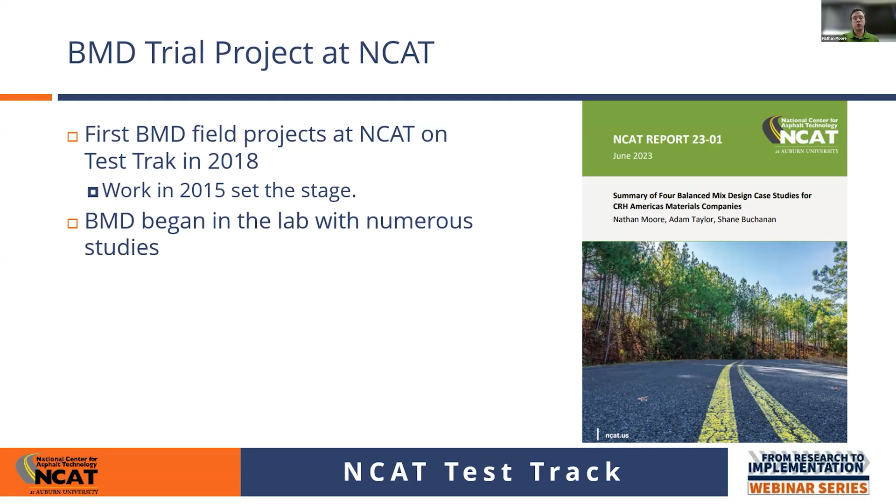So NCAT was involved, and I looked back through the history - I'm about 88% sure that some of the first field trial projects we were involved in, and I say field meaning non-research environment, non-test track environment, was in 2020 with the Alabama counties. We helped develop a simple BMD specification, I think Buzz Powell called it at the time, which allowed up to 35% RAP and had minimum ideal CT of 50 and a minimum high-temperature IDT of 17.

Those numbers were gleaned from work on the test track, and since the counties that used this specification were close by to the track, there was very simple adoption of these numbers.

So there were two counties, Houston County and Geneva County, who did a lot of this work. In a 2-year period, they placed over 60,000 tons of simple BMD mix on the counties. That's a really big deal because sometimes counties may not have all the resources that a state DOT has, or the state routes might have offered to them. So the idea here is: how can we better serve, from the county's perspective, the county engineers, and our constituents by producing good mix.

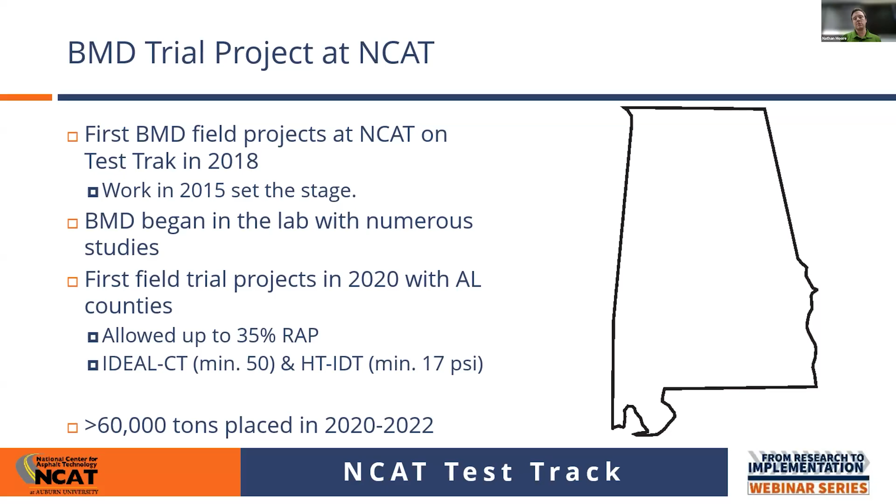Alabama counties were really proud of this, and this specification is now even still active.

What lessons learned as you move from the test track to the real world, or any research environment to the real world - you do have challenges. Early challenges as we move from research to the field include lab equipment.

How much additional equipment am I going to need that I don't have? What's the right type of equipment? What's the right load press I need to buy? How many environmental chambers or water baths do I need that I don't already have? Are there special jigs or software that I need? Are there more people I need to hire, or do we need new training to better understand some of these test methods and procedures?

Also, site conditions matter. You can go to the track or a small field experiment where you can pretty accurately characterize the site conditions. But if you're paving 60,000 tons, you're paving over all kinds of underlying layers, from something that could stand as a perpetual pavement to paving just on top of a chip seal. So that introduces new challenges and requires a lot of good planning.

Normally, when you see balanced mix design implemented, you see asphalt contents increase. This was the case in Alabama, where mixes that were former county mixes for those types of routes, when BMD came, saw an increase in asphalt content of 0.5% or even higher. That number is pretty common as you talk to different DOTs that have done the work of implementing balanced mix design. You see an increase in asphalt content.

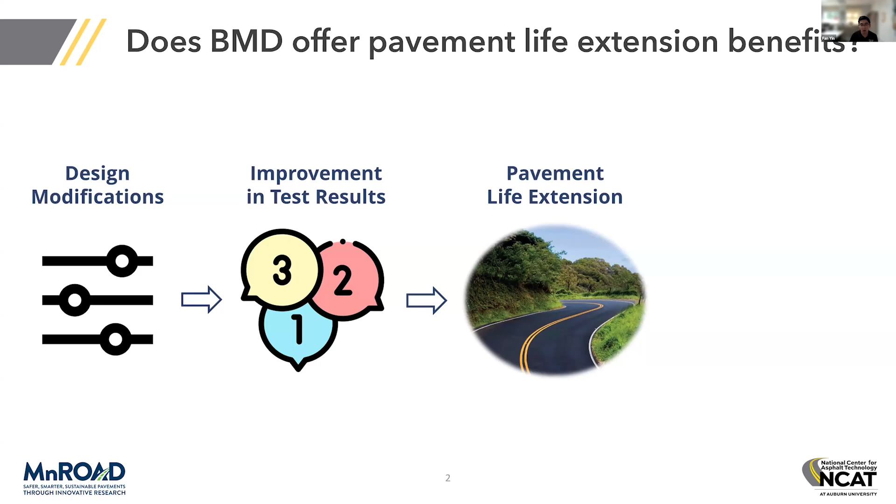That's really kind of the ultimate goal of what we try to do with balanced mix design. When we get life extension benefit out of it, it provides us the opportunity to look into the long-term cost savings and the environmental benefits associated with that. That's really the expectation when we talk about implementing balanced mix design.

Many of the field projects we have seen so far across our industry are only a few years old, and we don't have that real long-term data to look into these analyses to see whether or not we can achieve those expected benefits.

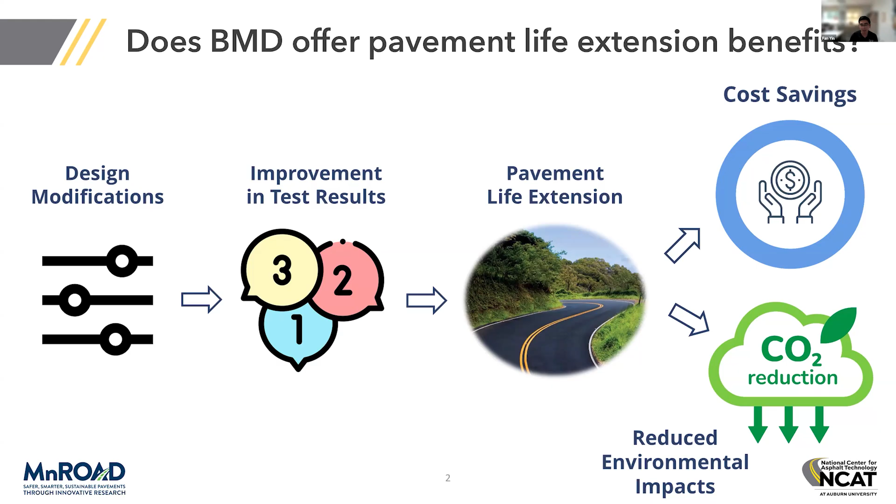With that being said, TxDOT approached NCAT, and we were very fortunate to have the partnership with TxDOT on this experiment on the test track, to truly leverage the advantages of accelerated pavement testing on the NCAT test track to look into that life extension benefit of BMD. That's really the focus of my presentation.

The focus or objective of this experiment on the track is very straightforward. It's almost an apple-to-apple comparison between the BMD mix versus the volumetric control mix. We put those sections next to each other to see how they perform. In our opinion, that's a real test.

In this experiment, TxDOT requested that we do overlay projects, because that's the type of projects they deal with on a daily basis, with a 2.5-inch mill and inlay on the track.

One very unique feature of this experiment is that we have a fairly challenging underlying pavement condition. We've been very excited about this feature because it does a really good job simulating what we have in the field.

Ideally we'd like to live in a world where we don't have much underlying pavement challenges - everything is perfect in terms of pavement condition, and we just do the surface layer on top, and it performs beautifully, right?

But unfortunately that's not the case. Lots of the pavements where we do overlay or mill and inlay projects, we deal with underlying cracking issues that will affect the cracking performance or overall pavement performance of the surface layer. So that's really the intent behind the decision to go with a 2.5-inch mill and inlay over a challenging underlying condition for this experiment.

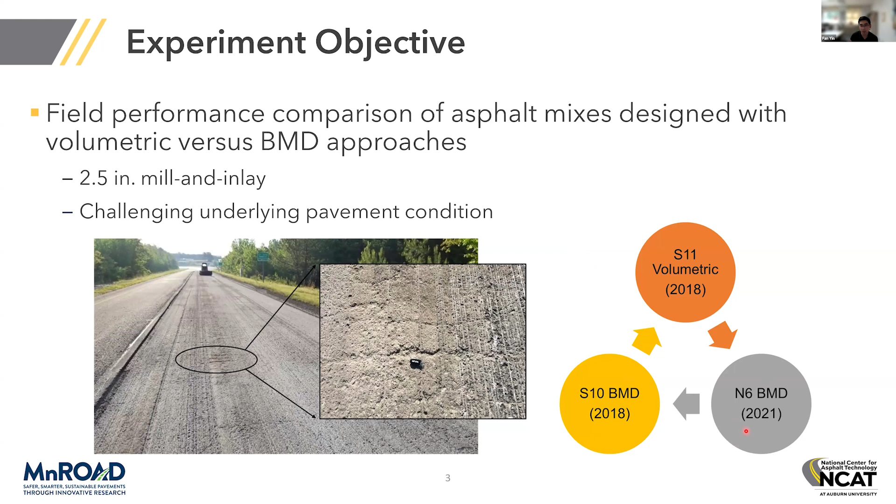Balanced mix design really varies from state to state, depending on what kind of pavement distress you try to battle against and what kind of mixes you want to apply. In this experiment, TxDOT decided to focus on a 12.5 millimeter SP-C surface mix.

Those mixes are all coarse graded with 50 gyrations. They all use the same component materials, but at different proportions. I'll give you more information on the next slide.

All 3 sections use a PG 70-22 SBS modified binder, and they all had the same RAP binder replacement ratio. That means the RBR remains the same, but the RAP content by weight of the mix is different, because they have different binder content required to achieve that spread in the test results in terms of rutting resistance and cracking resistance.

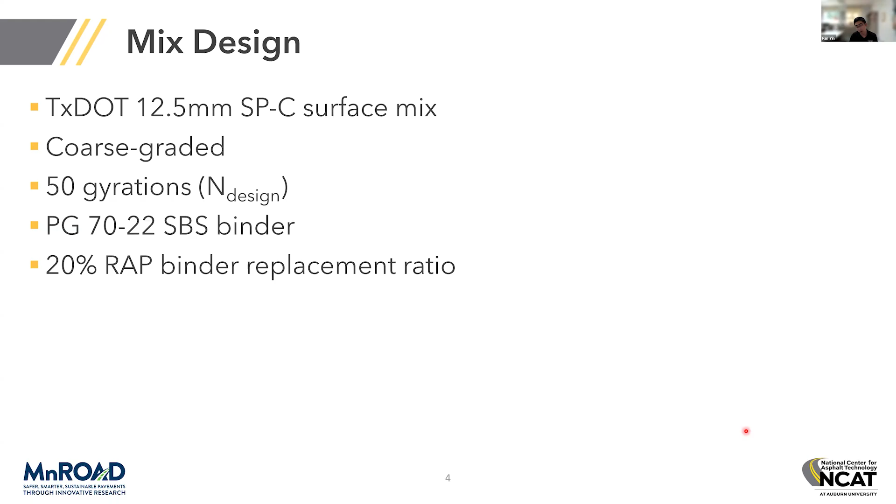Balance mix design is really like a buffet table. That's the term I've been using because there are so many different ways you can use to modify your mix design to improve your cracking test result, while at the same time trying to maintain good rutting resistance, and therefore achieve that balance between those two.

Nathan mentioned there's been lots of work looking into asphalt content, but we know asphalt content is not the only tool we have to achieve balance mix design. Some other work in our community includes looking at gradation change, playing with recycled binder content, recycling agents, polymer modification, or lower temperature warm mix asphalt. So it's really up to the contractor to pick which one is most cost effective, while giving them the opportunity to optimize performance meeting the agency's specification.

In this specific experiment, UTEP, University of Texas El Paso, was the research partner involved in the mix design effort. The modification approach they took for this experiment was to look into the gradation change, and based on that, to play with different asphalt content.

I mentioned earlier that all three mixes are coarse graded. So what they did from the mix design modification standpoint was to further coarsen up the gradation so you can create a more open void structure within the mix that allows more asphalt binder to be added, while maintaining your designed air voids.

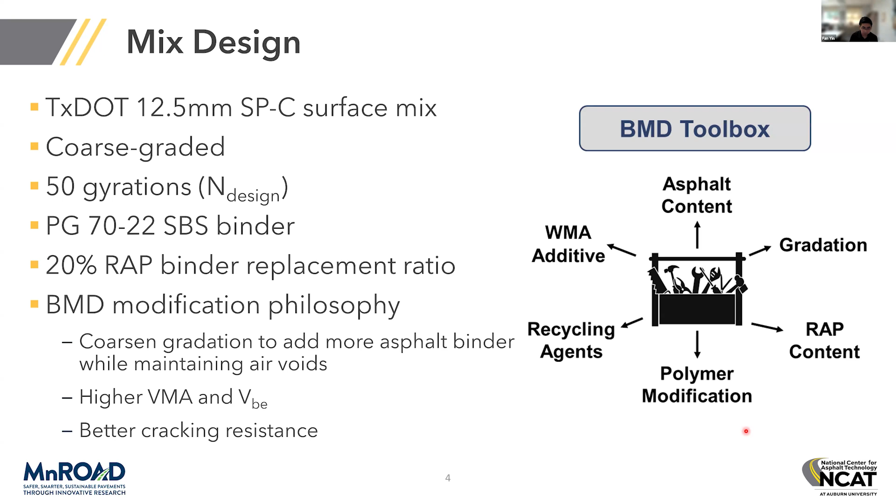There was lots of design detail that, in the interest of time for today's presentation, I'm not going to share all of, but here's a quick summary of the mix design differences among the three mixes we have in this experiment.

For the volumetric control section, the total binder content was 4.7. If you look at the BMD mix from the same research cycle in 2018, that number increased to 5.5. That's a 0.8% unit increase in asphalt content. That's a lot, right? We know asphalt binder is the most expensive component.

Nathan mentioned earlier that lots of work in the BMD era has looked into increasing binder content. That's really one of the most effective ways to improve your cracking resistance. We know it's going to be more expensive because of the higher binder content, but the expectation is that this change will give us better performance, longer life, and that will justify the material cost increase from the life extension benefit standpoint.

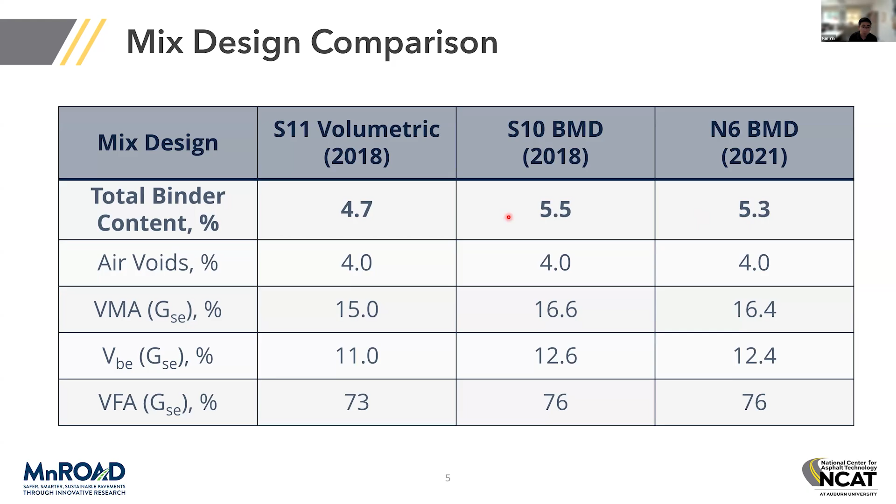In this case, they are looking at the rut depth at 15,000 passes for the rutting criteria. Maximum rut depth is 12.5 millimeters at 15,000 passes for that PG grade I mentioned earlier. And for the OT data, the parameter was CPR, the crack propagation rate. A lower number indicates better resistance to crack propagation.

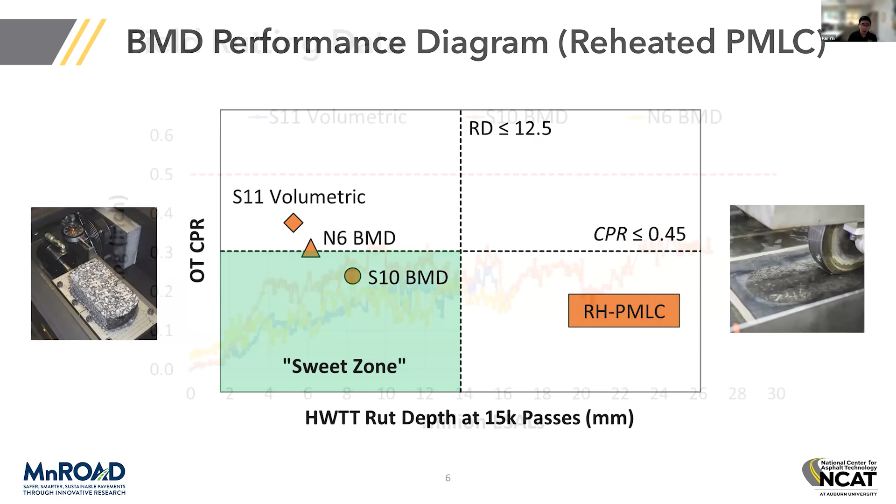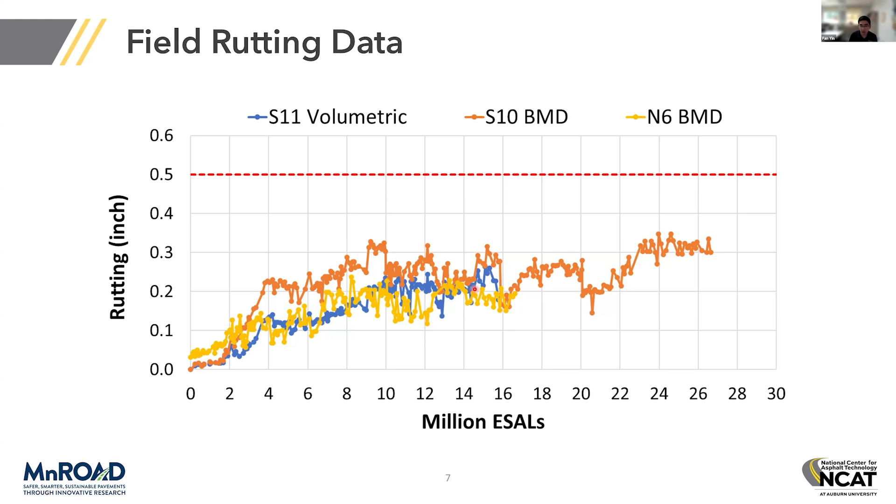Now if you look at the S10 BMD section, it was placed at the same time as S11 volumetric control, with identical underlying conditions.

One thing you notice first is that it took longer for this section to show cracking in the field, compared to somewhere between 5 million ESALs, we were able to delay that to somewhere between 9 to 9.5 million ESALs.

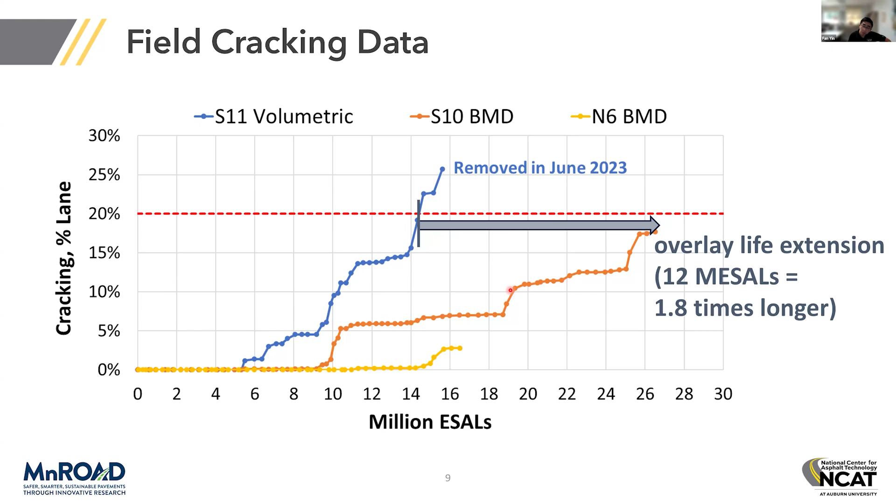After we got these field performance data, we did some preliminary life cycle cost analysis and life cycle assessment using the field performance data. We did the LCCA analysis using some of the guideline information that TxDOT has been using. There's lots of assumptions that go into this analysis, but I'm not going to walk you through those details.

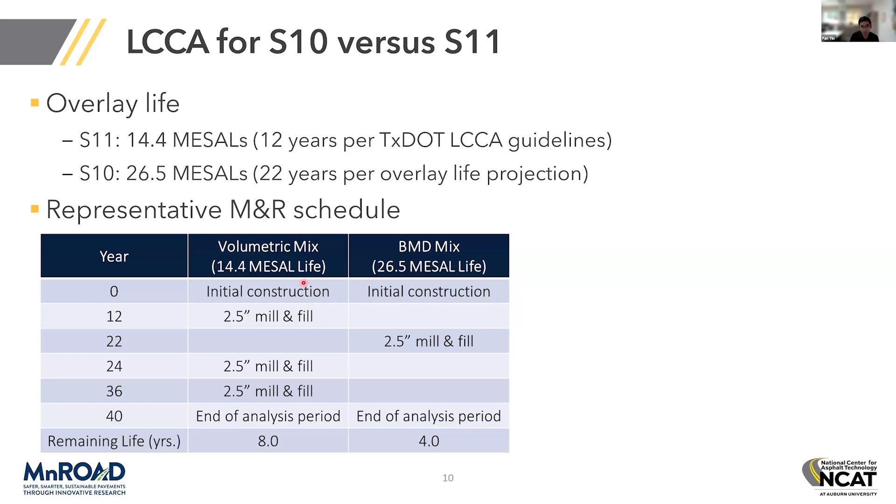The most important part is that we're able to take the field performance data from the test track and translate that into a life cycle pavement maintenance and rehabilitation schedule for a hypothetical overlay project or open highway in Texas. Because of their field performance difference, the volumetric mix and the BMD mix are going to have different overlay cycles within the analysis period.

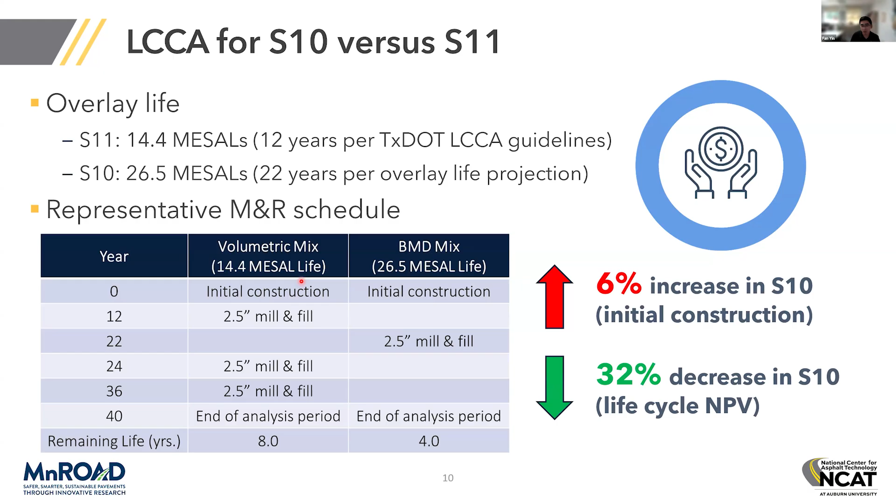So now jumping into the conclusion of this LCCA, because of the higher binder content in the BMD mix, we saw a 6% increase in the mix cost for the BMD section compared to the volumetric section. That's only the initial construction part of the story. But because of the extended life from the BMD section, we do see a 32% decrease in the life cycle net present value associated with the BMD section compared to the volumetric section. So that number is significant. It definitely highlights the life extension and also the cost saving benefit associated with balanced mix design.

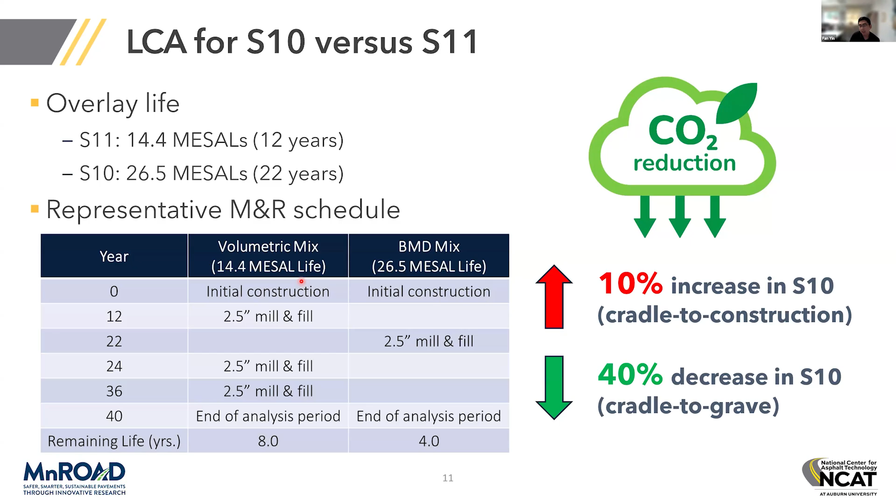And then the same thing we saw on the LCA side, from cradle to construction, we saw a 10% increase because of higher binder content, higher CO2 emissions. But when we look at cradle to grave, considering the whole life cycle assessment, that is where we saw a 40% decrease in the BMD section compared to the volumetric section.

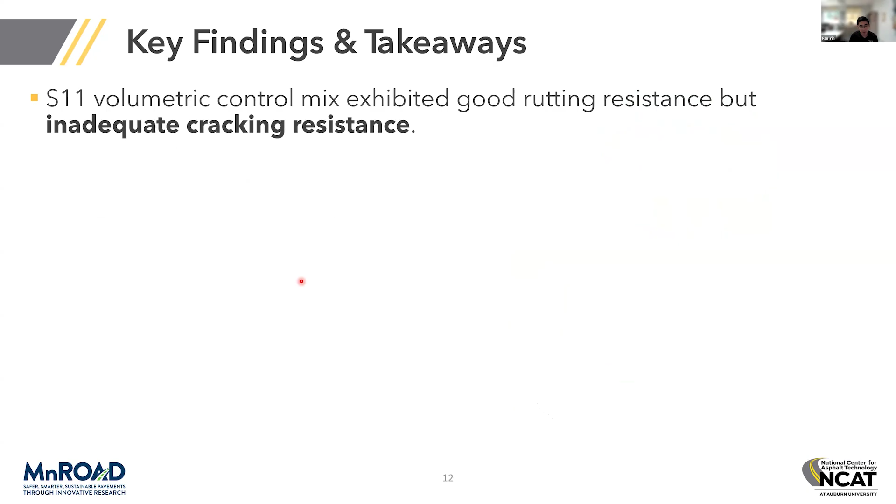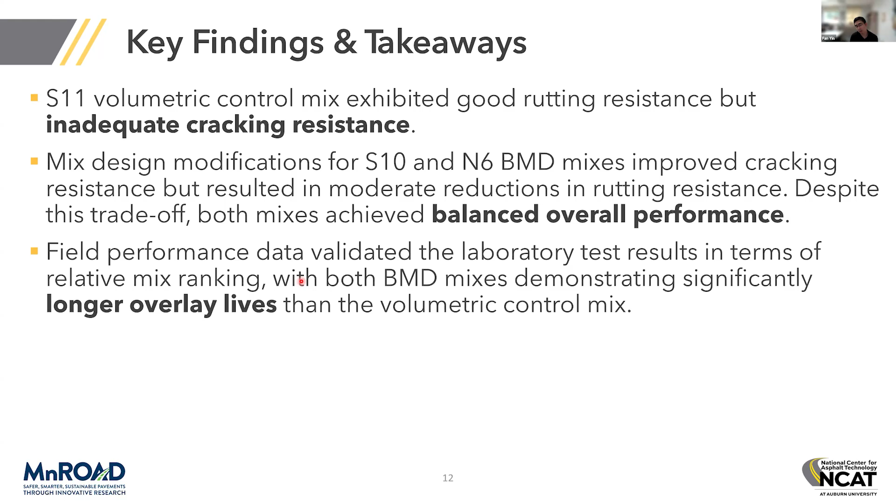So wrapping up everything, what we learned from this experiment is that the volumetric control mix showed good rutting resistance, but not so much on the cracking side. That's what we expected, knowing what we have seen so far in the field. The mix design modification for both BMD mixes significantly improved the cracking resistance, but resulted in some moderate reduction in rutting resistance. But that shift gave us more balanced performance between those two properties. The field performance data on the test track validated the lab test results in terms of relative mix ranking, with both BMD mixes demonstrating significantly longer life compared to the volumetric control section.

So the most important finding from this experiment is that implementation of balanced mix design should be expected to improve mixture quality and extend pavement service life. Even though the initial cost may be higher for BMD mixes because of the modification required to achieve that balanced performance, if we look at the life cycle assessment for both cost and environmental side, we see benefit on the economic and environmental side. So that's really what we should expect with the implementation of balanced mix design.

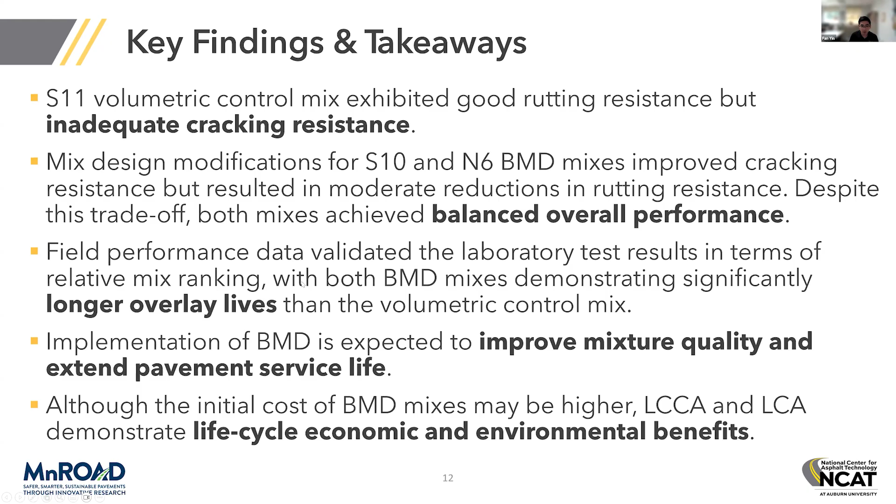So that's really what we learned from the exciting experiment from the test track. Thanks to the sponsorship of TxDOT for this exciting work.

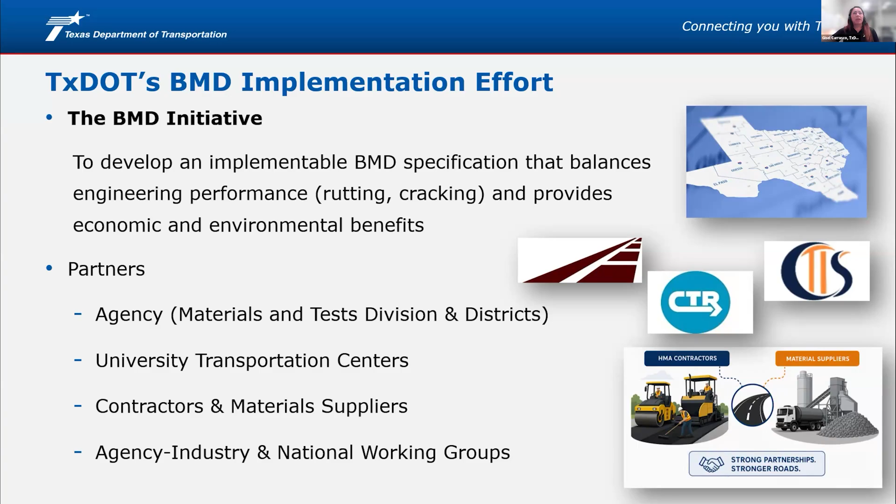So at the beginning, everything started with research, right? Developing performance tests, tests that started using the Hamburg test for rutting performance, and then the overlay test. Since then, agency and industry was heavily involved in the implementation. So they were already kind of familiar on the whole process of implementing a new test, more of this type of test that requires more than testing volumetrics on our hot mix. It requires a lot more equipment, more training for our technicians, development of new thresholds.

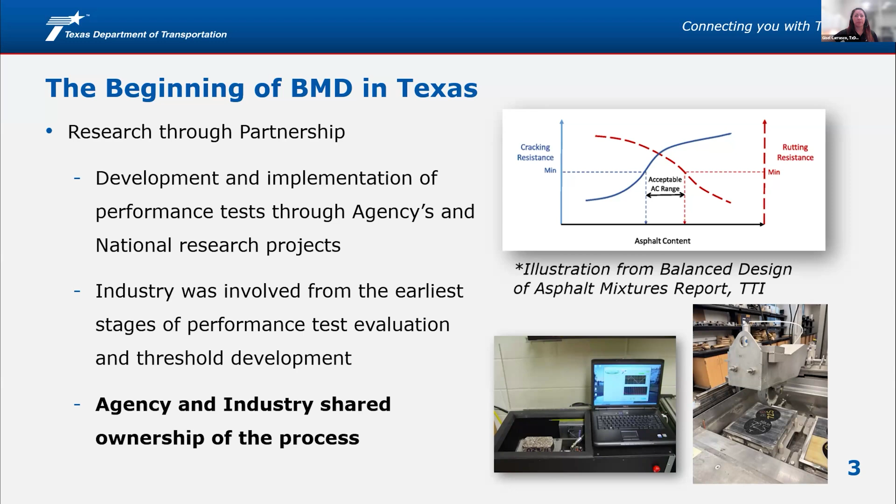As Fan mentioned, we started with our test with NCAT test track with our test sections balanced mix design. And as we're getting these updates through the years, we knew and it gave us confidence, not only to the agency but also to contractors, on seeing how the test sections were doing and how they were even doing so well that we decided to go to the next step.

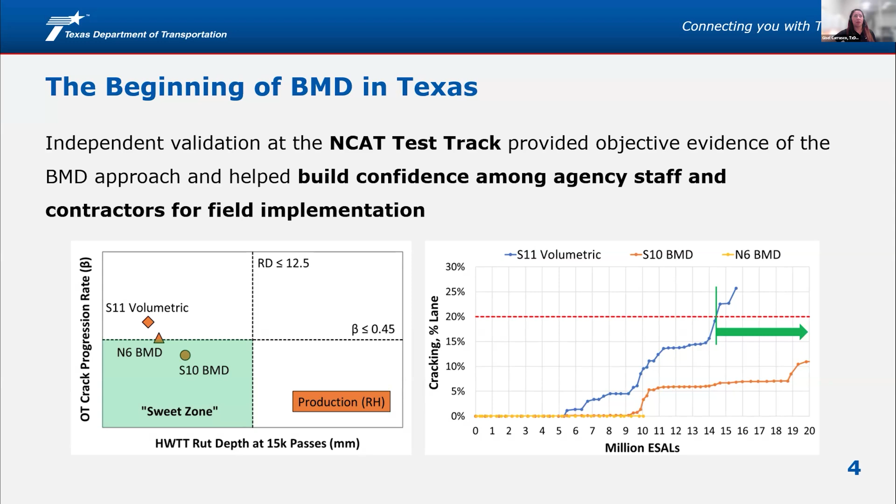The next step was to start building trial sections through our districts. So to do this, we started talking to different districts to see within a project that they already had going on to see if we could have test sections, and then 6 districts were ready to do it. And even though we had 9 test sections, within those 9 test sections, we had different combinations of materials. Maybe one section was with softer binder and the other one was with higher RAP. So we had a total of 33 test sections within the state.

This allowed districts and contractors to also gain hands-on balanced mix design experience, but we didn't have an implementable statewide specification at that point. The objective was to identify the challenges and build confidence.

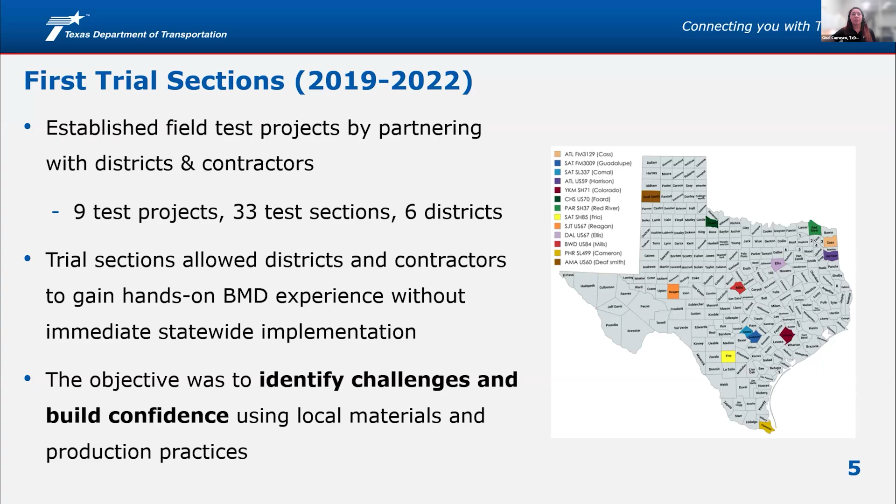Then the second phase for balanced mix design was more test sections, but now we wanted to see if we could produce this mix not just for a smaller test section, maybe a couple of days, 3 days of production. For that, we had a total of 4 test projects with 8 different test sections in 4 different districts.

When we were doing this, the Balanced Mix Design Working Group was developed. The goal of this group was to have not only the agency but also industry participating in this formal group so we could analyze all the data that we were receiving from our test sections and then see what were the concerns, what were the challenges.

Also, a different group was developed within the agency, which is called TxDOT Forum. The forum is a group of each district having a materials engineer or SME from each district that gets to review all these documents and all this information that we were getting and give their feedback. So it was not only the division reviewing the new specifications, but also all the districts had a voice to make their comments and their concerns, and we could share this information to the Balanced Mix Design Working Group.

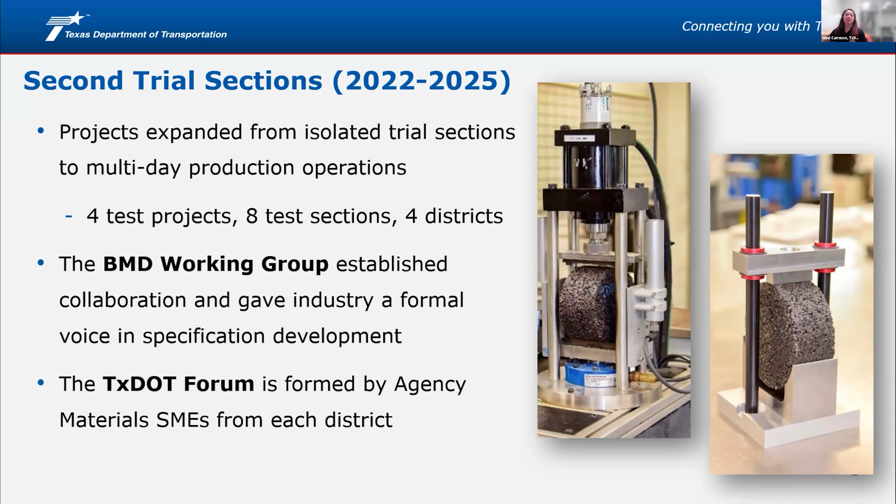So at the end of 2025, we were able to develop a one-time use special specification 3024, using all the data collected from the test sections. The goal of this specification was to use it in pilot projects.

Pilot projects will give the districts the opportunity to use this balanced mix design from the beginning of the project planning, all the way through letting and construction, using balanced mix design. That way the agency and industry will get experience using this new specification under real contracting conditions.

Last week, the El Paso District project started. It's been going on, and then we'll have Lufkin District starting next month. And then we have two more projects coming up in the following months.

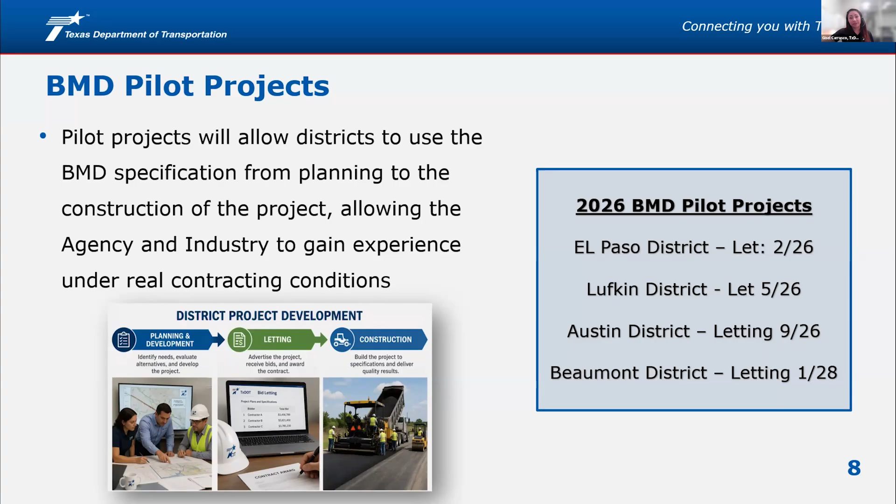So what were the challenges of implementing balanced mix design? Of course, the increase in sampling and testing requirements. We're having ideal testing being tested every day. It's a lot more testing than what we have in our regular QC/QA specifications.

And of course, the new equipment, we need more space in our labs, right? Sometimes those labs and the hot mix plants are small, so that's a big challenge. And then also certification, having our equipment calibrated, having technicians certified to run these new tests.

This test takes a little bit longer. They require curing of the samples, way more samples. That means greater laboratory workload and staffing needs and training.

And then with all this information from the pilot projects, we want to verify our criteria, right? And get and see and verify that our current acceptance and payment criteria can be adjusted. But that's going to be in the future, right?

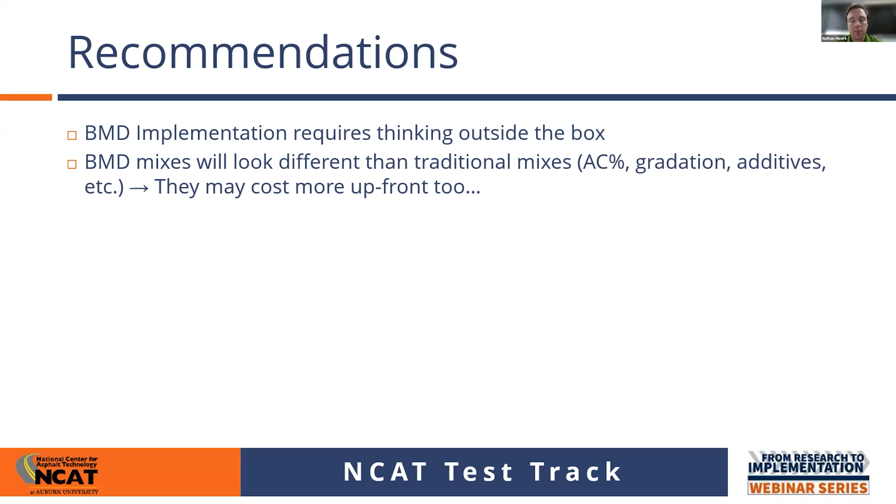And those mix changes are going to cost more upfront too. I think we just need to be honest with ourselves and recognize that they're going to cost more. However, the concept of price anchoring is very real - we have anchored our expectations for how much asphalt mix should cost off of mixes that across the country are on average too dry and not sufficient for meeting the needs of the traveling public. So yes, they may cost more, but I think it's worth it.

BMD and changes to mix designs like this will bring longer lasting pavements, and longer lasting pavements will equate to lower life cycle costs. It'll equate to lower life cycle emissions, so less strain on future maintenance budgets, resurfacing budgets, and rehabilitation needs. So yeah, we are sort of building this brick by brick, but it's worth it.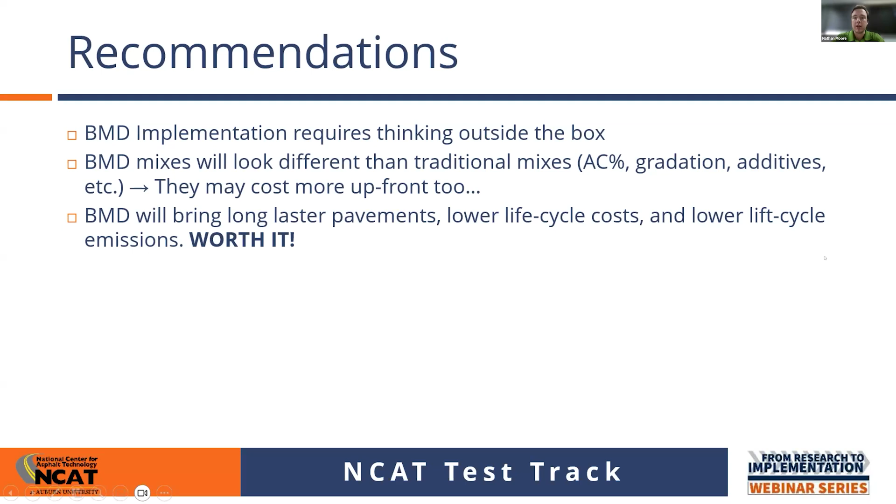Fan has a really wonderful case study that was developed in conjunction with the work that Texas DOT sponsored on the test track. But those case studies are all over the country in places that have implemented this. I see there were some folks on the call from Virginia who could probably tell you stories about this, and folks on the call from all over that have seen the value of balanced mix design and improving asphalt mixes in general, recognizing that it's worth it if we're having lower life cycle costs, more sustainable pavements, etc.

But these types of changes are slow and steady. TxDOT has been working on this for many, many years. I know some friends in Virginia had like a 5-year plan, for example, to implement balanced mix design. This is like smoking meat - it takes a long time, but in the end it's worth it. You can't microwave BMD. It is a big change, not just adding more asphalt to the mix. There's a lot. So slow and steady wins the race in this case.

Shadow projects, trial projects, where you're partnering with agencies and the agency and industry are partnering with one another to identify unexpected challenges.

Like, hey, I didn't realize that this was going to be the case, or that my workforce was going to have to be required to sample this much, for example, or that I didn't have the oven space necessary to age specimens or keep them hot.

But it also gives hands-on experience. And I thought Giselle's point was key. The main point here is really to build confidence. You're not trying to change the world with trial projects or shadow projects. You are on a fact-finding mission to figure out what challenges we need to overcome as we proceed toward implementing balanced mix design.

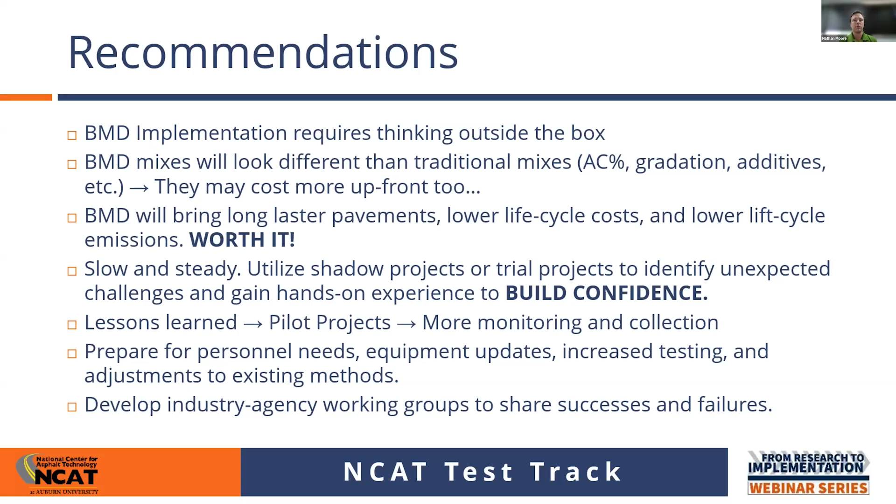And I thought Texas, you guys have just done a tremendous job of utilizing trial projects to collect information. So well done, and thank you for participating today.

So with that, I saw there's quite a few questions coming up in the chat. So Travis, I'm going to kick it back over to you. Thank you, Fan. Thank you, Giselle. Cool, cool, such a timely topic.

I really like this, and I really love how driven this is into the implementation of BMD in Texas, and I love that map that we get to see sometimes of all the different districts that have used this, the different counties and so forth.

So one of the things that came up, and it's kind of come up a couple times - I see there's some discussion going on in the chat group there, but I really like this one. I think it's worth discussing, and I think all three of you have a good perspective on this. What kind of correlation have we found in the data between the Ideal CT testing and the overlay testing? Are we finding that both relate to field performance? Do they correlate well with each other? Fan, you want to take that one first?

Yeah, I'll be happy to. For the BMD experiment on the Texas BMD experiment on the track, we did run Ideal CT as well, including different aging conditions. We have some good correlation or good agreement between the two, because this experiment is all about binder content and gradation difference, and both tests seem to do a really good job capturing that. I would say we have also seen some other data where those two tests may not correlate strongly because of the nature of the test. But in terms of picking up a dry mix or difference in binder content, those two agree really well.

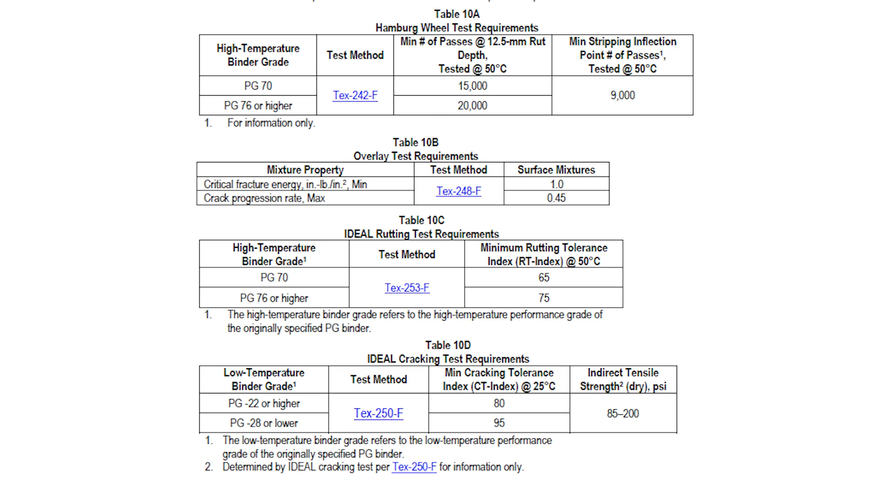And I think that's really neat that you have those 2 levels. So in production, when things are going smooth, we can go ahead and use both of the IDEAL tests to make sure our production is staying consistent. But then if we have an issue, we have built into the specification a way to go to a higher level test that we feel is a bit more extensive.

I think that's a fantastic approach, probably a really great way to have this dialed in for getting into QA, because that's a big part of where people are asking questions from DOTs: how do we do quality assurance with BMD and move this past just the mix design phase. So this question has come up a couple times, and Fan, I noticed you've thrown your poster up there.

Will you cover real quick the correlation you've seen between the Hamburg wheel tracking and the IDEAL RT testing? Yeah, absolutely. Long story short, these 2 tests correlate well, especially when you have mixes that do not have stripping issues in Hamburg. But when you have those mixes, you got to be careful with how you interpret your Hamburg data, because Hamburg is not just a rutting test, it does have that moisture damage component.

So depending on how you analyze your data, if you focus on pure rutting parameters, then those parameters correlate extremely well with IDEAL RT. And that poster that you made, does it include the data from NCAT report 2601? Yes, it does, and also includes a whole lot more data, not only from the southeast part but also northeast. I think we cover more than 60 different mixes from different places.

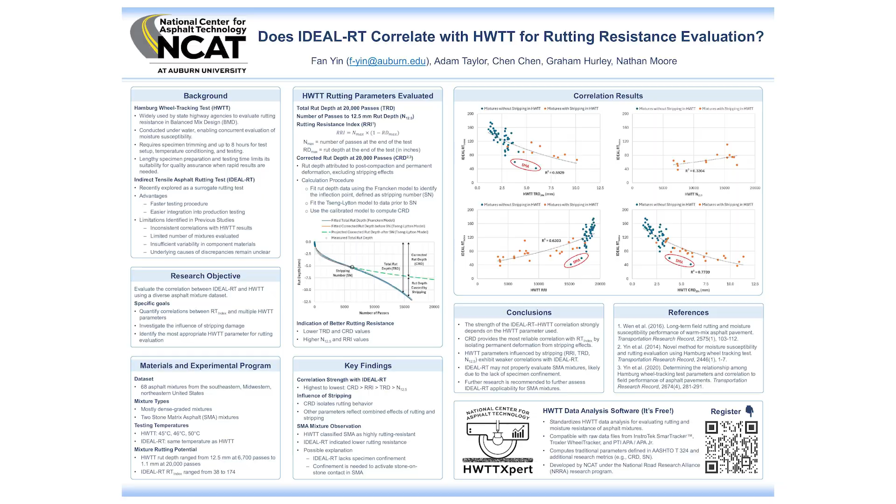Well, Nathan, you want to give just an idea of what's in that report 2601, and do you have some knowledge of the app that was created as well?

I don't know what app you're referring to. The analysis tool? Or is that a Fan thing? Oh, you're talking about the Hamburg stuff? Yeah, that was just more like a tool, a web-based program that we developed to try to help users, agencies, contractors standardize the calculation of any parameters you want to get from the Hamburg wheel tracking test. Oh yeah, that's right, but Nathan can talk more on the NCAT report.

It shows really strong correlation for preliminary data between all of the rutting tests. The correlation shape and sort of parameters are a little bit different, but as long as there's no stripping involved, rutting tests seem to correlate with one another better than cracking tests. It's not perfect, but better.

Travis, I'm actually going to jump ahead. I know we're kind of running out of time, but I did want to circle back to Grover's question that I saw in the chat, something about cracking tests or studies that don't just use additional binder. I kind of was trying to tease some of the work that you had done on the side.

What stuff I did was super preliminary at the time, and I think this has actually been validated through other laboratory experiments. But Grover, to answer your question, yes, there has been a lot. When BMD first started, and I remember when we started doing training classes in the late 2010s on balanced mix design, all of our examples were asphalt content, and we would make the comment about how you can use other things - RAP percentage, rejuvenator, gradation and additives - but we didn't have a lot of data on that. That's really not the case anymore.